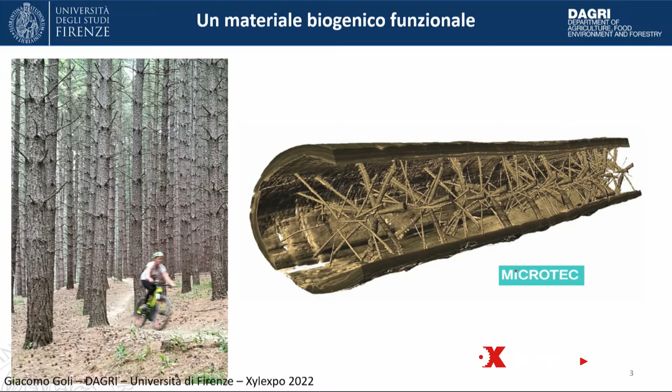This also gives opportunities because wood is a biogenic material, which has a special relation with CO2. It's very advantageous from an environmental standpoint when you do life cycle assessments of wood-based or wooden products. It's a hierarchical structure, strongly anisotropic, and this structure characterizes wood considerably, which is very important when working it.

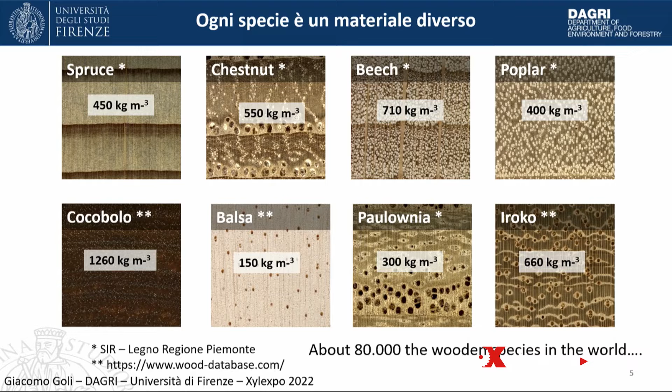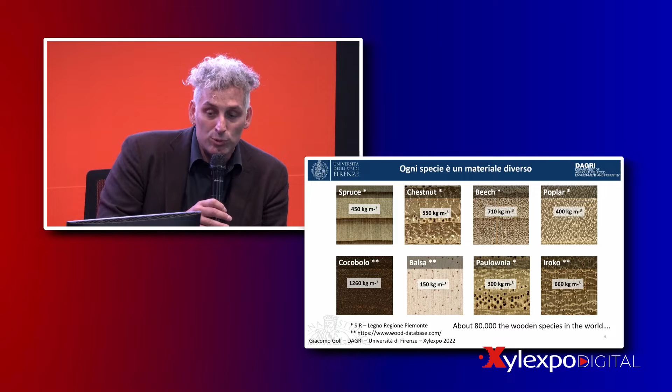There are about 80,000 different wood species in the world, and the panorama is very varied. Cocobolo has a density of 1,260 kilograms per cubic meter. Balsa is next to it at 150 kilograms per cubic meter. It's like comparing stone to polystyrene. Each individual species has its own anatomical characteristics determining its behavior, including density.

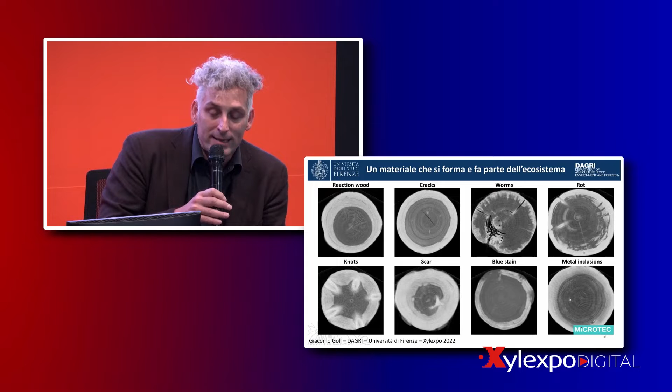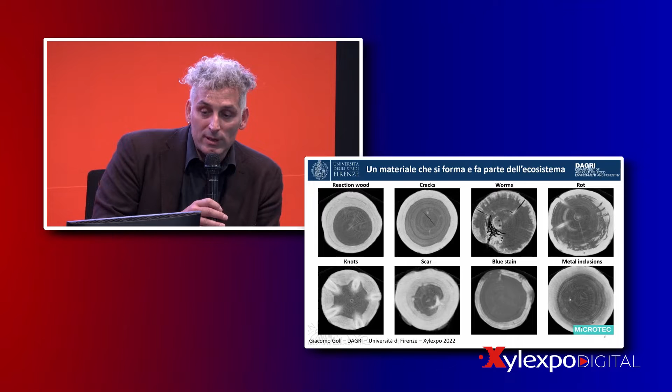Wood does have many defects. These images were made available by Microtec. You see knots, for instance, or cracks, fissures, and worms. The black tunnels are insects digging tunnels. So we find a lot of weird, irregular things inside wood that we have to consider when we're going to work it or mill it.

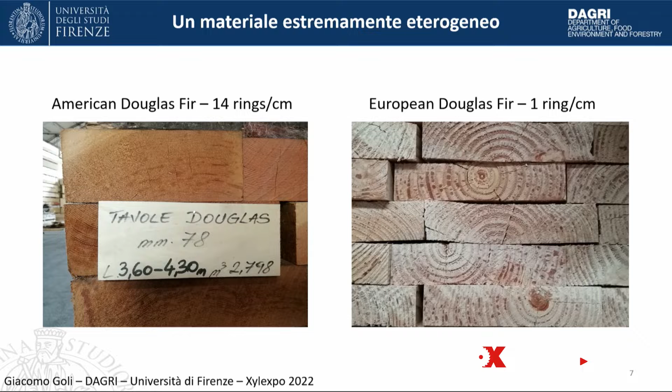We also have to consider that a single species can have highly different characteristics. On the left, American Douglas fir has 14 rings per centimeter. The European Douglas fir has 1 ring per centimeter. So the density and growth characteristics are so different they're almost different species, but they are the same species. You have to consider all this when thinking about woodworking.

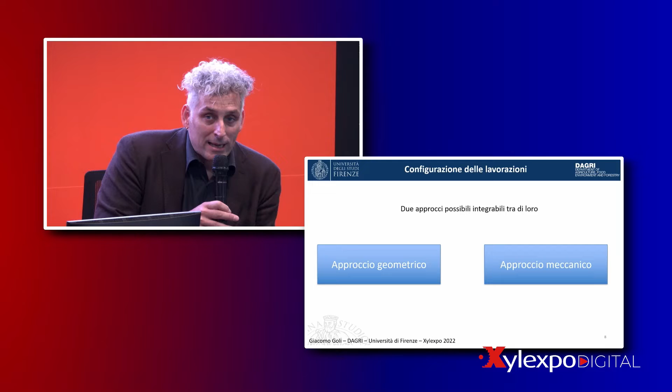When thinking about configurations, we can have two approaches: a purely geometric approach based on the kinematics of woodworking, and a more mechanical approach that we have been working on in recent years, developing studies talking about cutting speeds and forces.

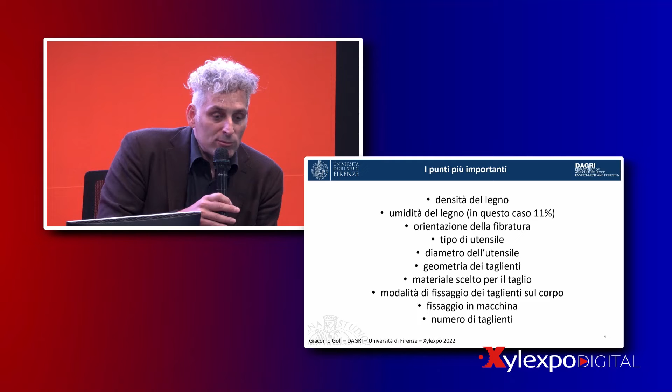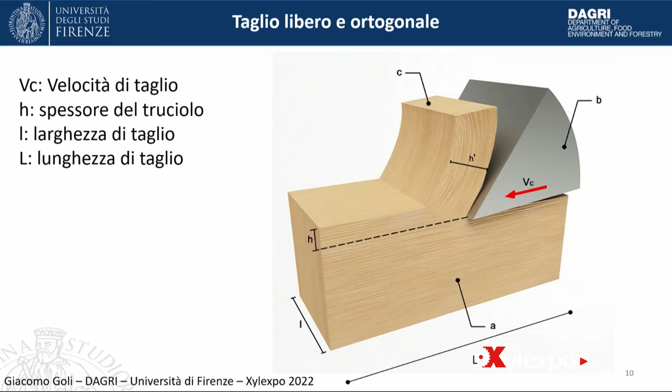Let's think about the simplest cutting manner, the free orthogonal cut. Here we have the cutting speed, the chip thickness, the cutting width, and the cutting length. This is the easiest type of cutting.

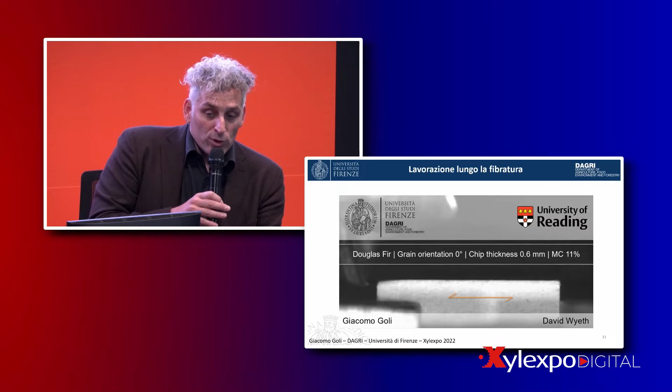In this model, I'm showing you how wood behaves when recorded by a high-speed camera. You see it's longitudinal, and the knife is cutting very well here, at 15 kilohertz, basically 15,000 frames per second.

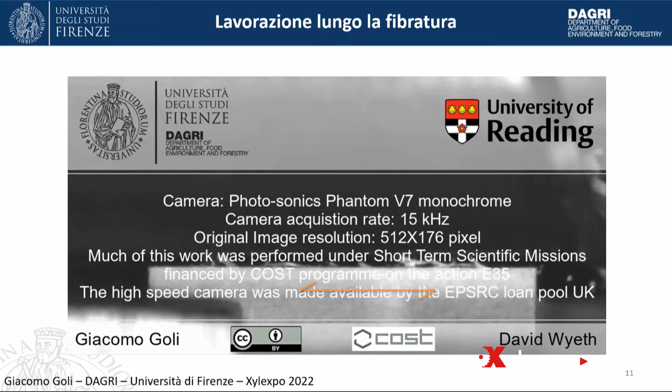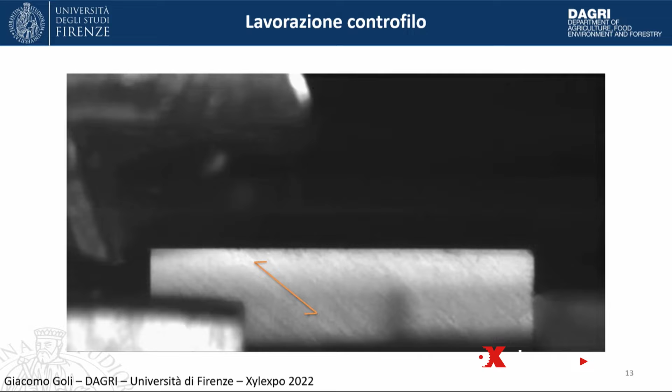If I put the grain slightly tilted in the direction of the cross grain, the cutting edge exercises totally different strengths, or forces, than it would when working along the grain, which I imagine you're all well aware of, but you really see what happens in these pictures.

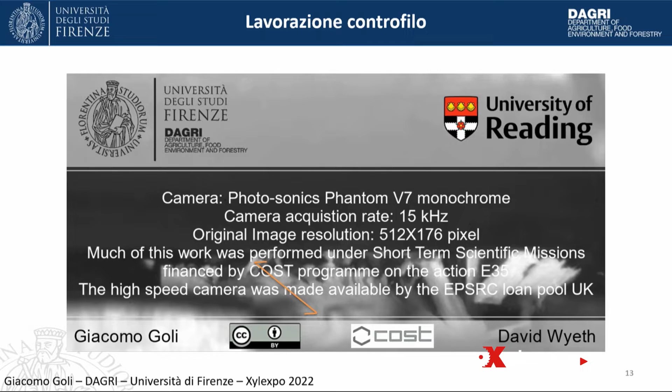And when we talk about forces, we see the differences between two extremes: the longitudinal cut, and the last one, cross grain.

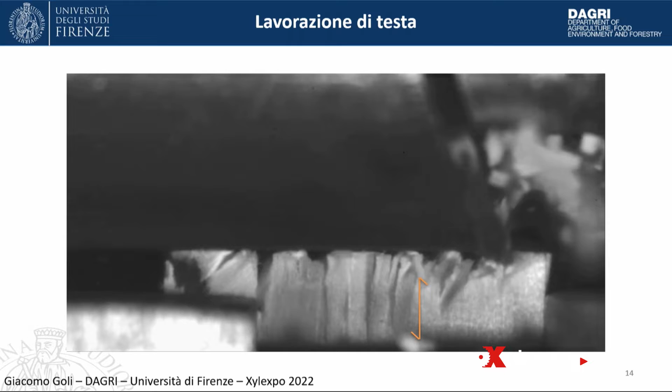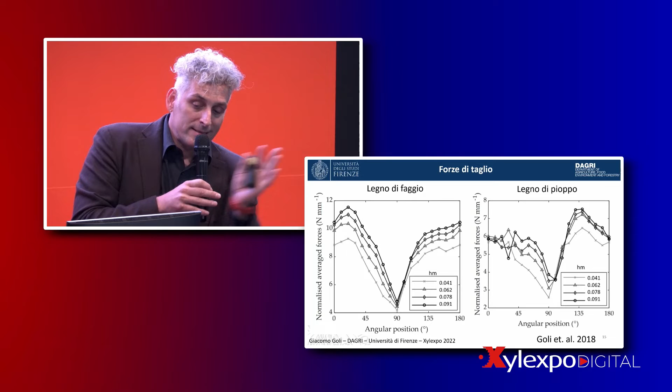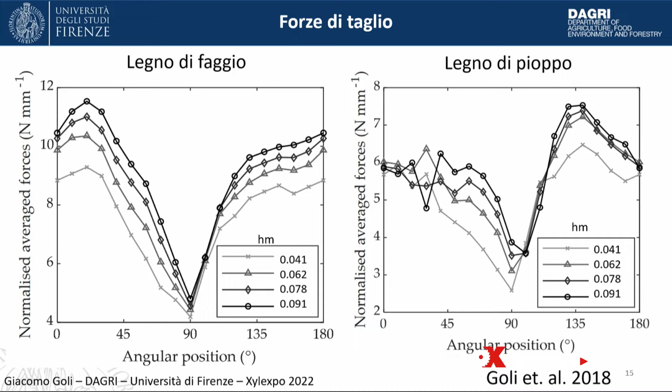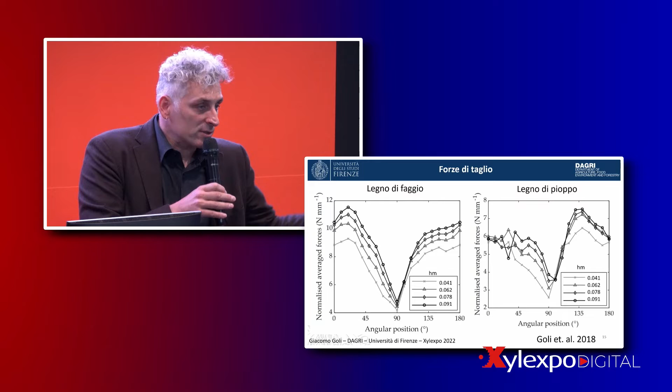Here on the left we have shear forces for beech chips. 0 to 180 degrees represents cross grain profiling. The strength needed to cut beech at 0.091 thickness, the darkest line with circles, is 5 newtons per millimeter of section, whereas going crosswise it's double - about twice the strength needed when working longitudinally. If you look at the right hand chart, poplar wood is less dense, so it shows different, lower strengths. Different wood species can produce higher or lower strengths.

We can calculate the strength of cutting a chip. With beech at 0 degrees, you need 150 Newtons of force, like 15 kilograms, to push it away, whereas perpendicularly you need 300 newtons, or 30 kilograms. With poplar, the values are lower, 100 and 150 newtons.

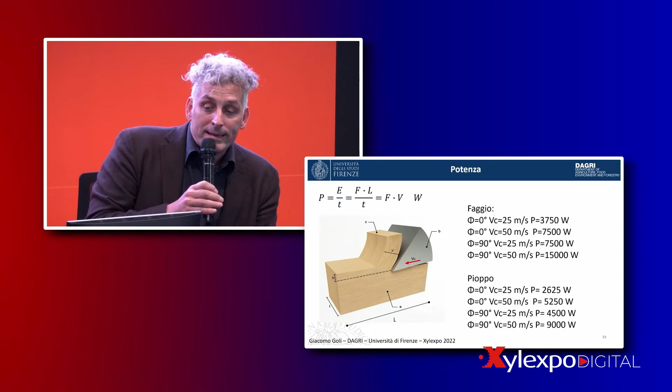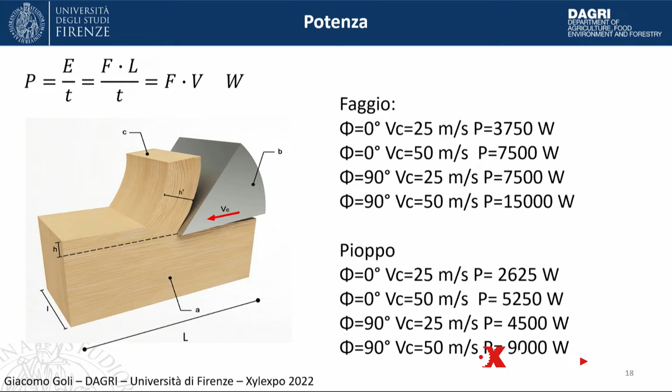From here it's easy to calculate power from strength. Power is strength multiplied by speed - force times speed gives us the power needed to do this job. With beech, working at 25 meters per second speed, 3,750 watts are absorbed. Going faster, at 50 meters per second, I need more power, 7,500 watts. If I work perpendicular to the heads at 25 meters per second, the power needed is also 7,500 watts. And so on.

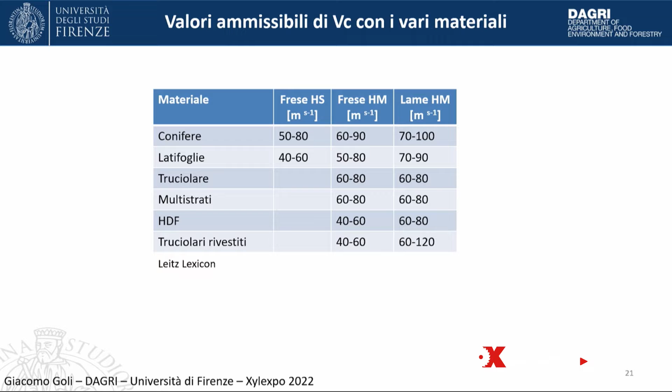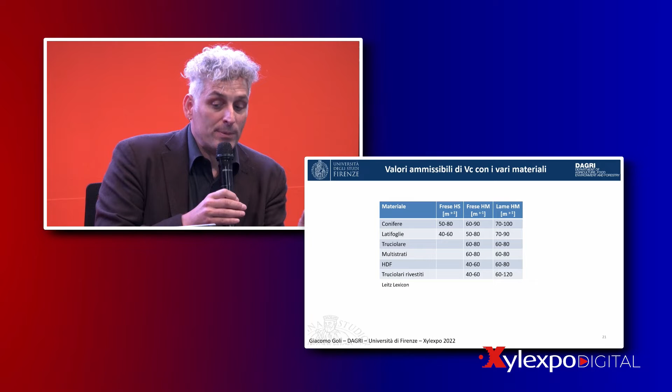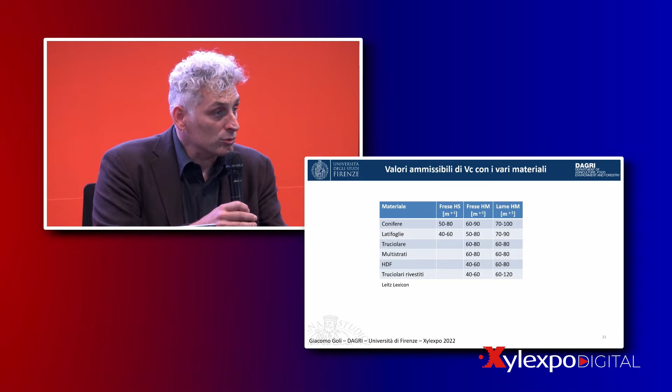How does cutting speed impact the process? The faster I go, the more heat I create, and the hotter the tool gets, wearing out much faster. That's why speed ranges are advised. For instance, with soft wood, for HM millers, we use 60 to 90. Whereas with hardwood, we have to go at slower speeds, otherwise wear and tear would be much faster. And so on with all the types of wood-based materials.

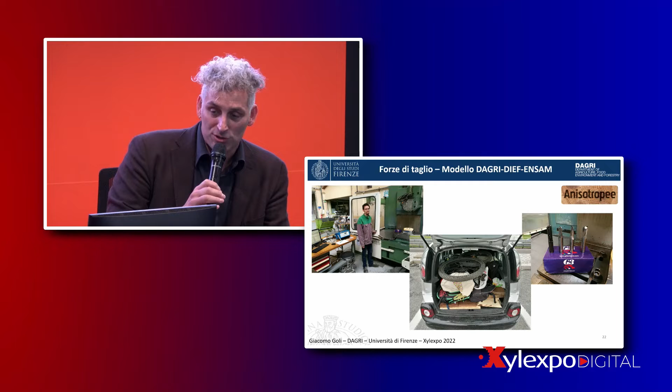We did tests in France, staying there 2 months. We also had a bicycle with wooden panels below, as part of this anisotropy project, sponsored by the University of Florence. I would also like to thank Gianluca Fantacci, who made 3 special millers, or cutters, just for us. And how does the model we developed work?

We have 4 entry variables: the grain angle, wood density, the actual angle of the knife - it can be straight, tilted 15 degrees, or whatever - and the working mode, up milling or down milling.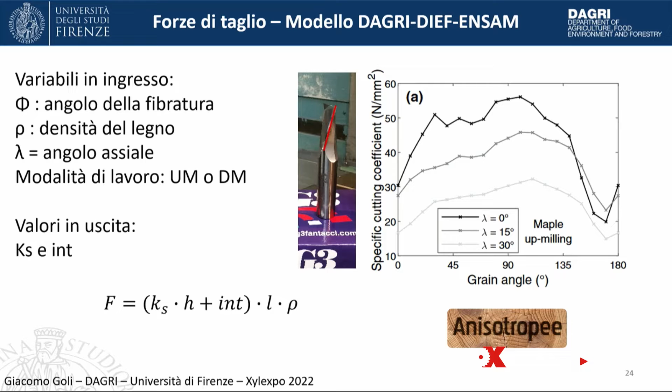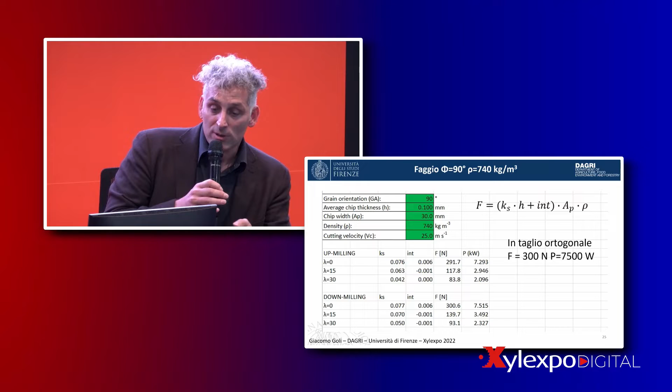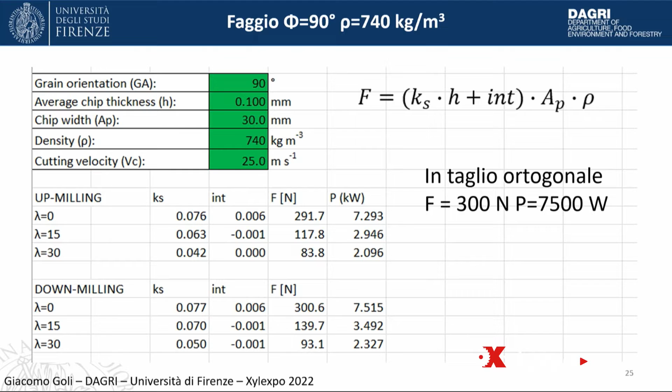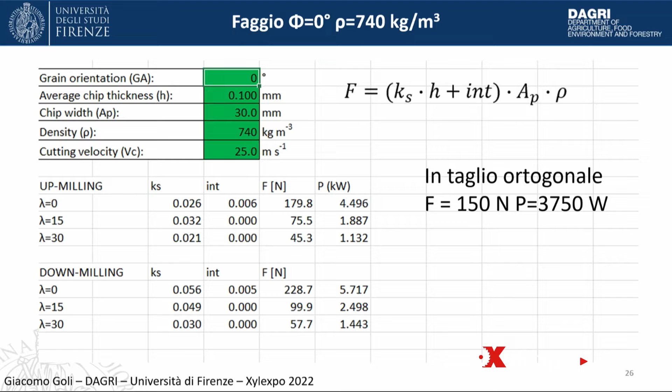I could spend hours on this, but what does the model tell me? There are 2 coefficients, Ks and int, and my formula uses h, the thickness of the chip, and L, the width of the chip, to tell me what force I need to cut the chip. Graphically shown here on top: grain orientation 90 degrees, chip thickness 0.1mm, chip width 30 millimeters, density 740 kilograms per cubic meter, cutting velocity 25. Depending on up milling or down milling and the different lambdas, I get peaks that change - just by using the formula and changing the lambda of the milling tool. In terms of grain orientation at 0 degrees, you see the powers on the right - I'm using much less energy here.

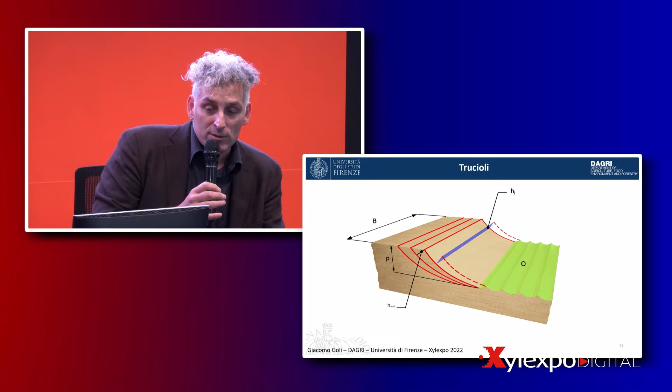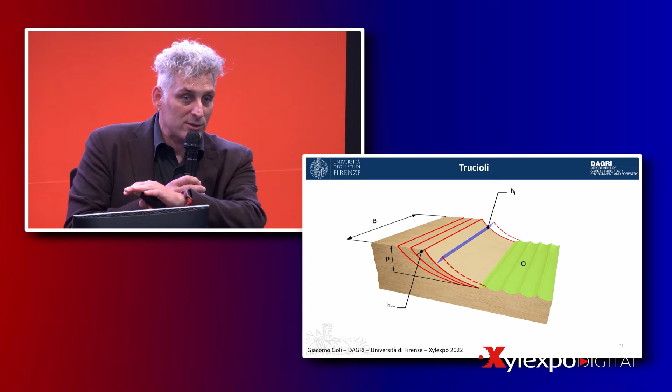This is an introduction to show you how it works. Let's try to apply it to a rotating tool - this was a simplified version for orthogonal cuts. The chips produced here are weird: they are cycloid arcs with zero thickness at one end and the highest thickness at the other end. So I have a number of chips whose thickness is not the same, and I need to calculate the average thickness of the chip. Since it's cycloid arcs, the surface will be left striped by those arcs. There are a number of factors coming into play here - I'm not going to list them, but we have time.

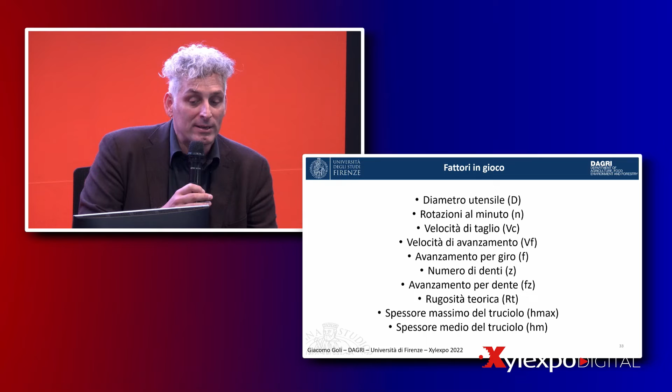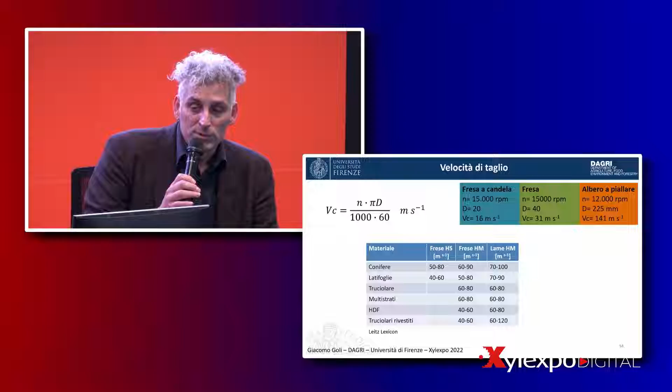So it's various factors, and we have the number of dents or teeth. Theoretical rugosity, a number of roughness, and I've created 3 working conditions.

An end mill cutter, a profiling cutter, and then a planer, with different speeds.

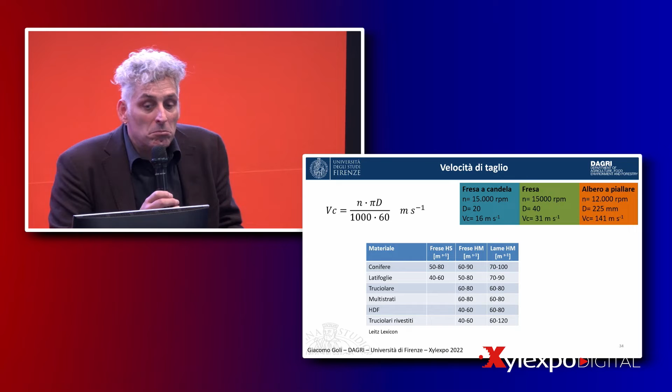You see that these 3 different working conditions immediately produce very different cutting speeds. In the first case, it's 16 meters per second, which is very low. And I'm talking about the end mill cutter. So here we're talking about 15,000 revs per minute.

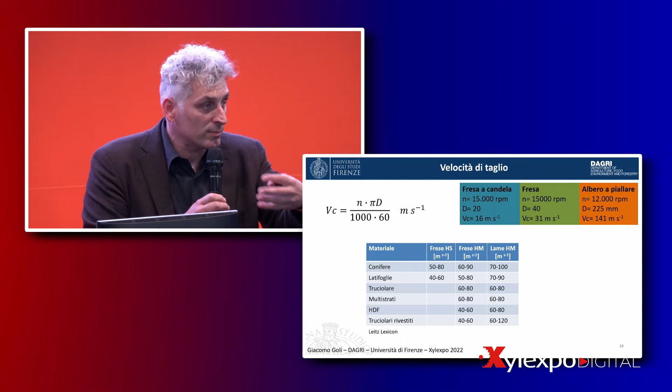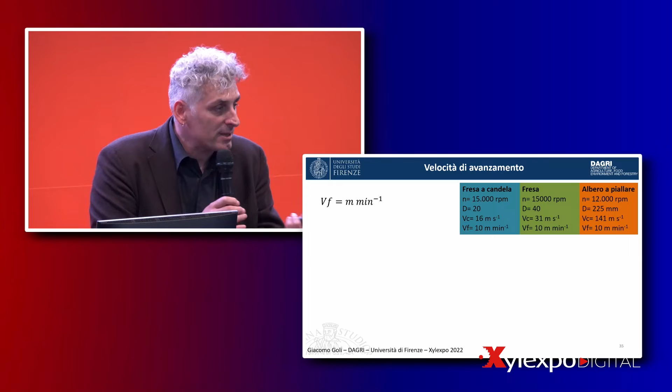Second case too, larger diameter creates higher velocities or speeds, but they can still increase them. The planing shaft instead, we're already talking about 141 meters per second, so it's quite a lot already. So looking at cutting speeds here, I can decide whether I can work at higher revs per minute or not.

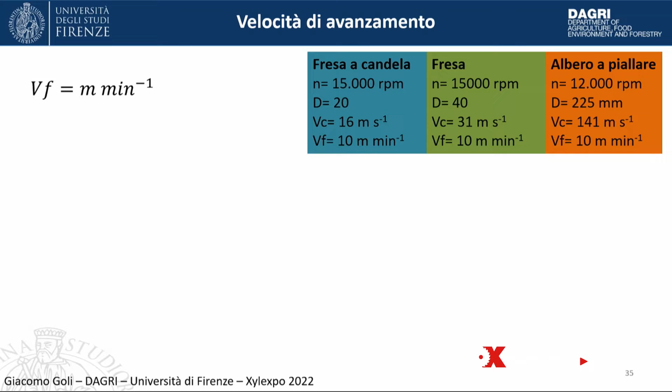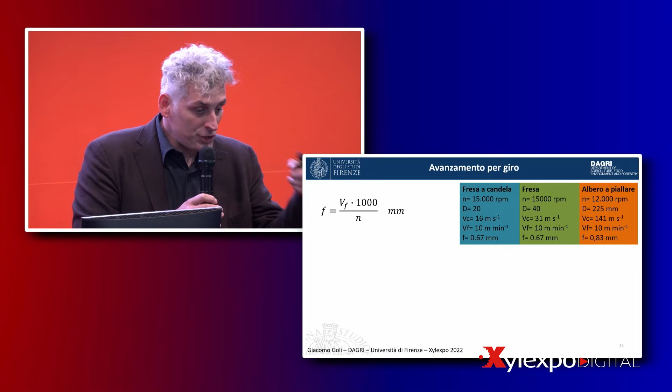Another problem is feed speed, which is the purpose of this presentation. So I set for all 3 working conditions or methods 10 meters per minute as the feed speed. And feed speed, of course, wood moves, and my tool rotates and cuts chips.

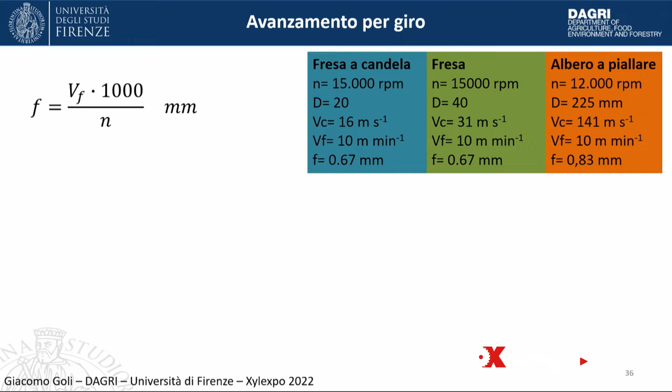In this case, we're going to calculate feed per revolution, F, which is quite an important parameter telling us the feed for each revolution. Feed of the tool. Why is this important? Because the more the tool cuts chips, the more the feed, the longer the stripes, the higher the crests, and the more it will be visible geometrically by the end user, who will see it as a bad, ugly surface.

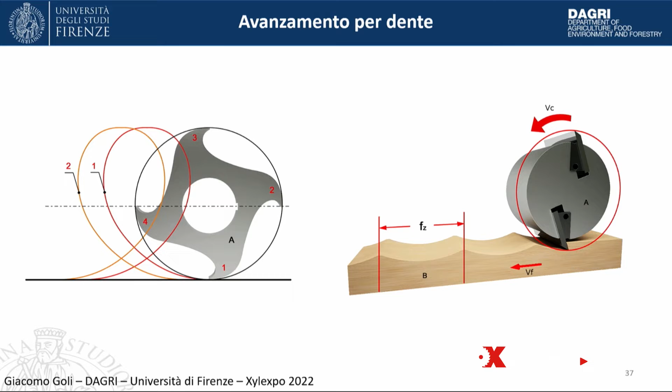F, that we've just seen, is a parameter, but what matters the most is Fz, that is, in the time of one revolution, wood is moving on, but with more cutters, more knives, I can cut more chips. Fz is the feed per tooth or per notch.

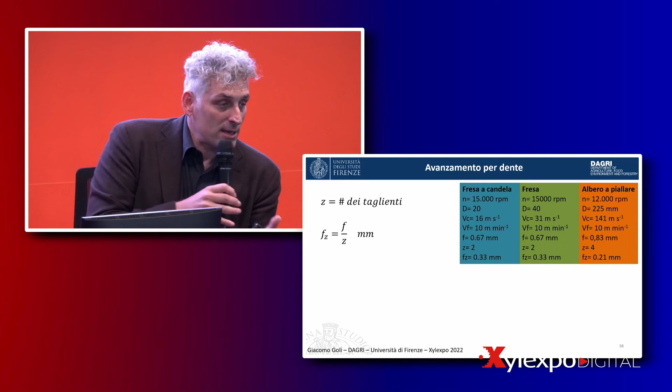So if you look at the end mill cutter with 2 teeth, FZ, the cutter to the planing shaft Z4. So the FZ is the same for the cutters, but now it's different for the planing shaft, the 0.21.

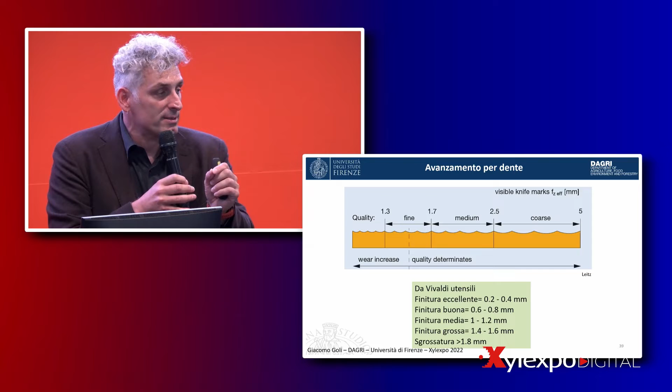This is helpful to see. These are Leitz or tool data, but they define the quality. As you can see, if I have fine quality, it goes from 0.2 to 0.4 millimeters. So if my FZ is between this range, I will have good fine quality.

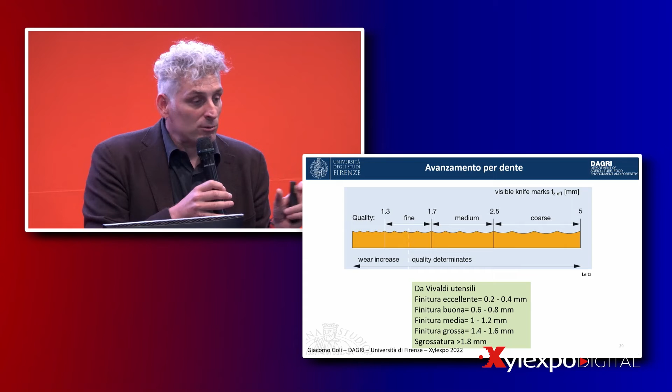If I increase FZ, I will see those waves, and so quality decreases. So setting the feed speed can be done geometrically using the FZ formula to obtain the FZ I need.

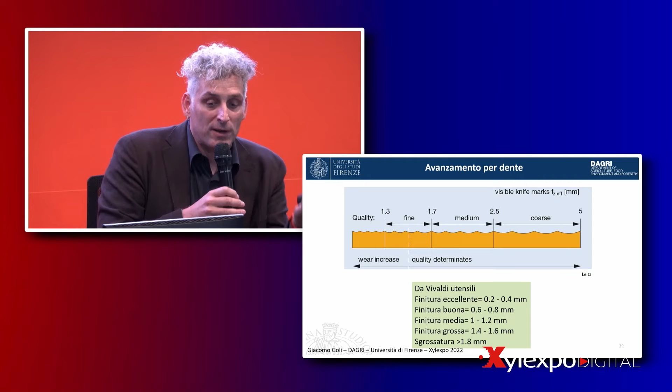If I need to make a beam that is going to be placed 20 meters high, I can have less fine quality. But if I want to have a manufacture like this, an item to be held in a hand, then I need very fine quality.

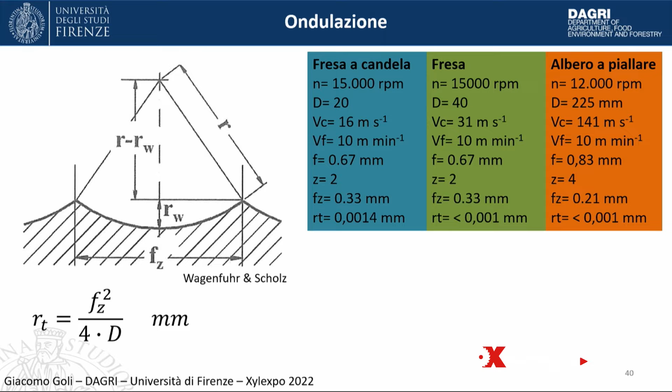Another key factor is how tall the crests are compared to the lower plane. In my drawing it's RW, the waves, how much is the height between the bottom part and the upper part, RW. This is another easy to calculate parameter.

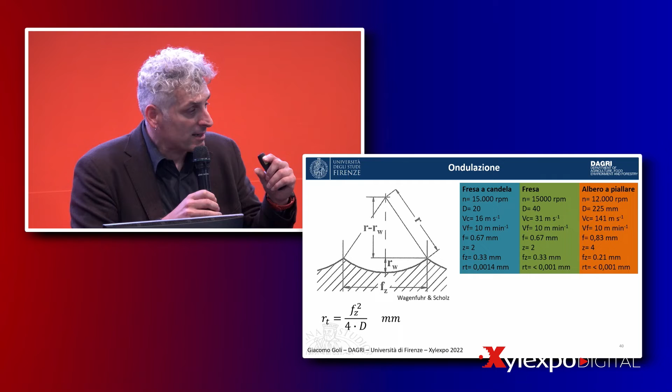If this parameter is below 1 micron, as in the case of the cutter and the blade, you can barely see it. Whereas if you have the end mill cutter and RW is higher than 1 micron, then you can start appreciating and seeing these crests.

I've tried to develop a graph, and this is a simulation of a surface obtained with processing at 5,000 revolutions per minute and 6 meters per minute.

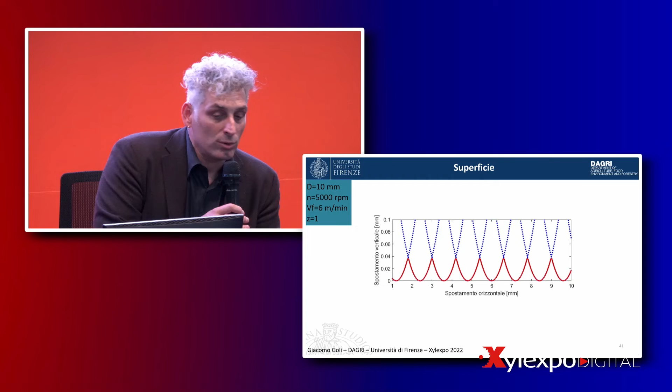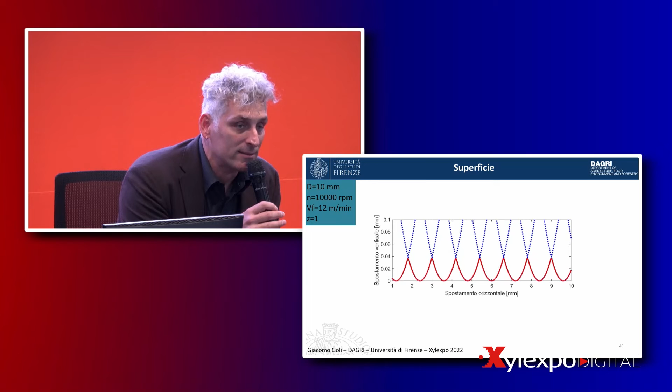So what happens if I double the feed speed and the cutting speed? Nothing really happens, because if the RPM and the feed speed both double, my final surface will be identical. If I work with 6 meters per minute and 5,000 revolutions per minute, when I double these two parameters, I will obtain the very same result.

So if I have a surface that I'm satisfied with, but I want to increase my productivity, I may as well increase the revolutions per minute together with the feed speed and still have the same result.

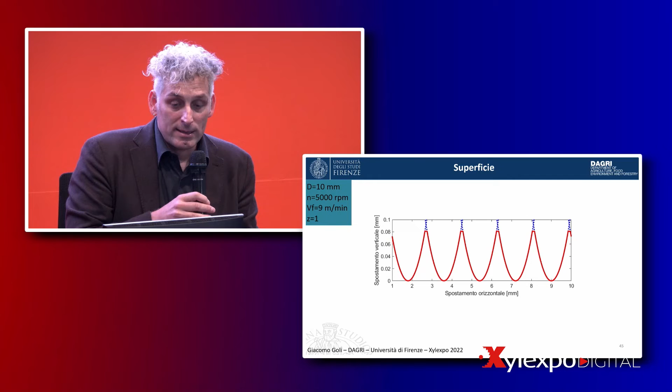What happens instead if I increase the VF parameter, feed speed? FZ also increases, and the surface becomes more irregular, so there will be all these waves that are more visible.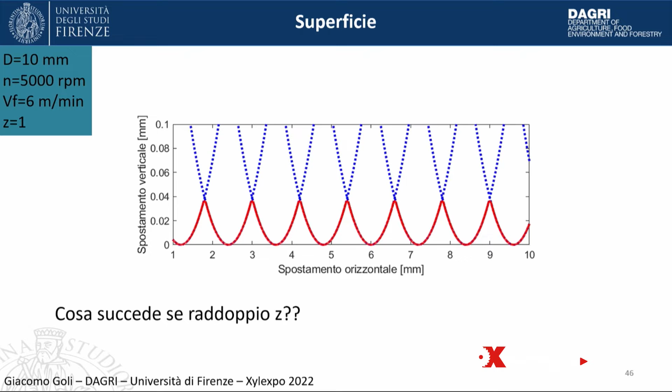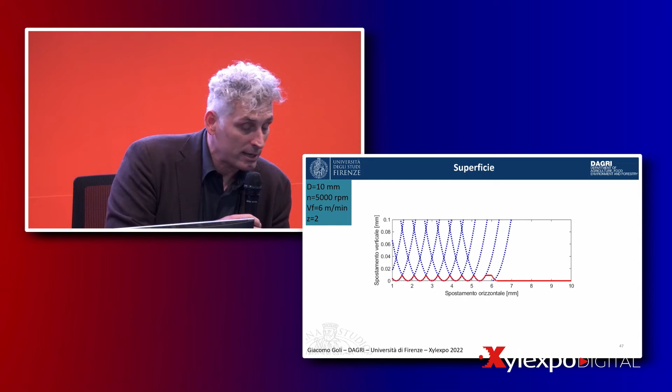What happens if I double Z as a parameter? So instead of using one cutting edge, I use two cutting edges. Well, the result in graphical representation will be this one, a more regular surface.

What happens if I increase the diameter of my tool and all the other parameters remain the same? Well, in this case, I will obtain a better surface, a better quality surface. With small tools, I may have unsatisfactory surfaces, and so I can improve its quality simply by increasing the tool diameter parameter.

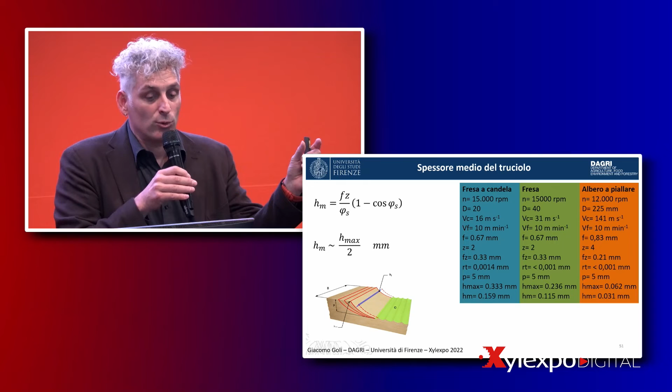Another aspect I can calculate with these formulas is the chip thickness, H max. In the case of the end mill cutter, it will be 3/10. In the case of the blade, it will be 6/100, so much smaller. However, when you calculate the cutting forces, we need the average chip thickness, which is very easy to calculate. You take the H max and divide it by 2. And this is what you obtain, the average chip thickness values.

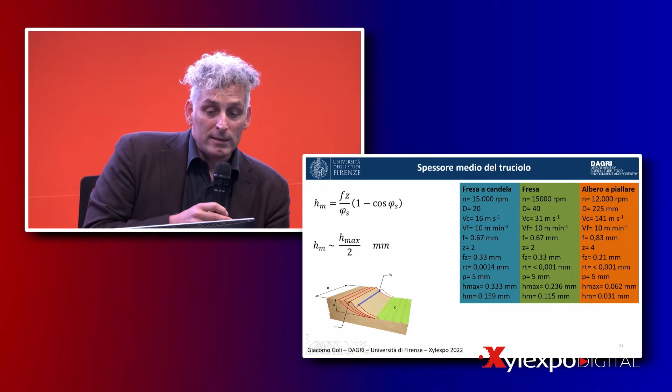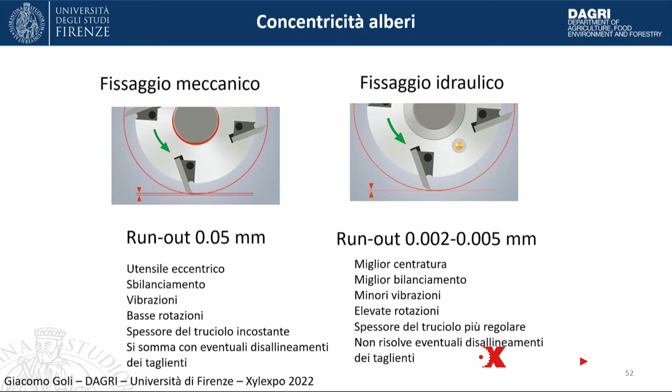An important point I'd like to make is about the fastening system. If I have a mechanical fastening system, in order to insert a shaft inside another shaft, I need to have some room to play with, at least 5/100th. So I will have a run out at least equal to 0.05 mm. The average chip thickness in my blade is 3/100th, so it's much smaller than the run out of the shaft. So if I have 2 cutting edges, 2 tools, in these conditions, only 1 cutting edge will be able to work.

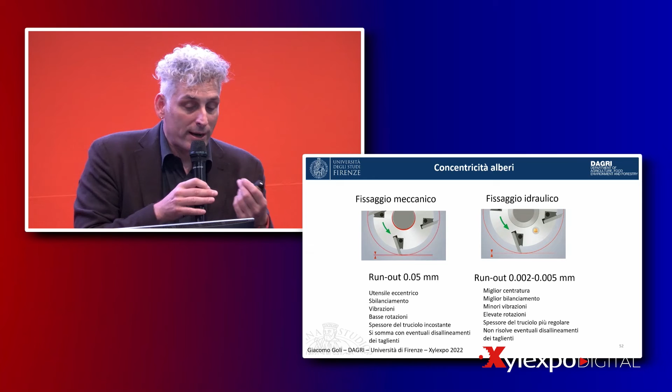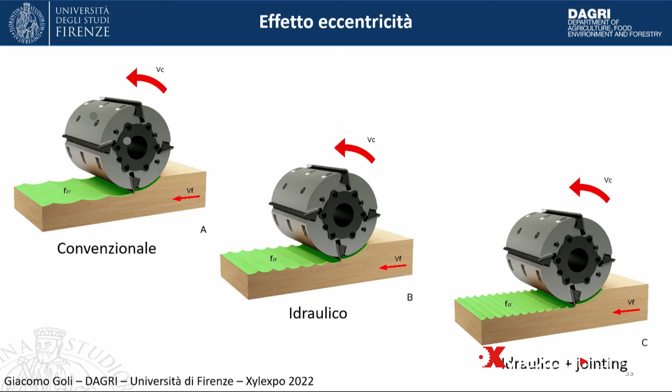If I have a hydraulic fastening, which is much more accurate and produces much smaller run out, 2 to 5 microns, I will work much better. So a conventional shaft, or spindle, will have only 1 tool, 1 cutting edge to work, and so my FZ will be very high, with an ugly looking surface. With a hydraulic fastening system, I will use more cutting edges, not all of them though, but still a better looking surface. Whereas if I use all the cutting edges on my machine after inserting the shaft, all the cutting edges will be aligned, and the quality of my surface will be very, very good.

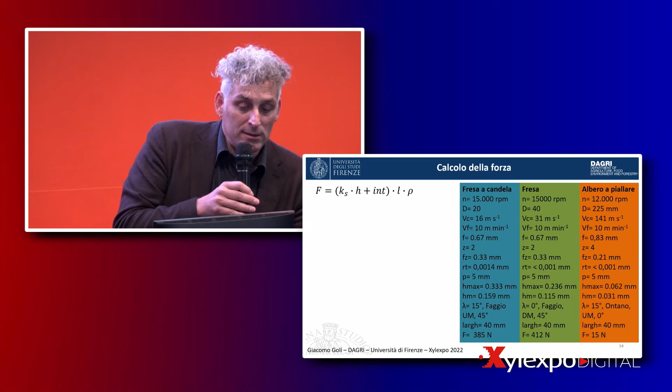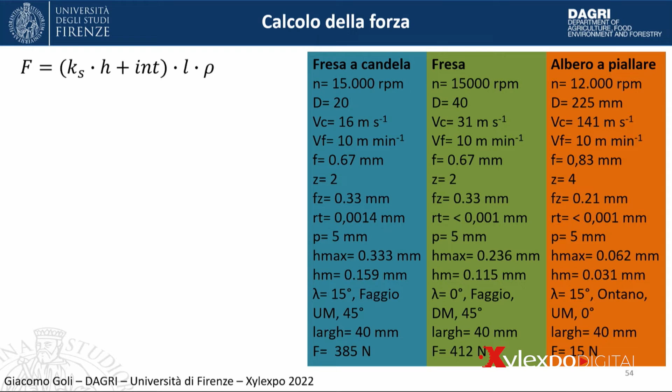So by using the model I showed yesterday, we can calculate the force required to cut these chips for an end mill cutter: it's 385 newtons, if I use beech with a 45-degree grain angle and a width of 40 millimeters. Similar conditions for beech wood with a straight cutting edge, I would use 412 newtons. Whereas in the third case, with the blade, if I cut along the grain with a 15-degree axial angle, I would obtain 15 newtons in terms of required cutting force. So this allows us to calculate ultimately the cutting power.

In the end mill cutter, I will use 6 kilowatts to perform this job. For a normal mill cutter, I would need 14 because I have a straight cutting edge tool, whereas in the third case with the blades, I have a number of factors that allow me to just consume 2 kilowatts only.

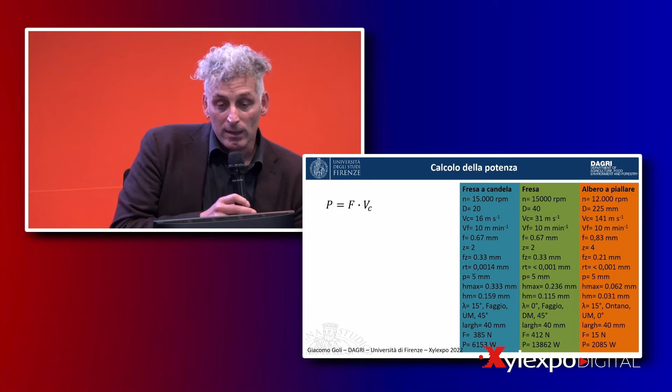So as I get to the conclusion of my presentation, I'd like to underline that I've tried to select the most important aspects in determining cutting speed and feed speed. There are geometrical criteria or formulations that I can insert in an Excel spreadsheet that can provide good guidelines and input for setting up this type of woodworking process. I can also adopt mechanical models that allow me to calculate the cutting force and power, and this gives me input on whether I need to increase or decrease the feed speed, or whether I am working with a higher or smaller chip thickness. So whoever works with wood needs to be proud to be able to work and interpret a material that is extremely complex and heterogeneous.

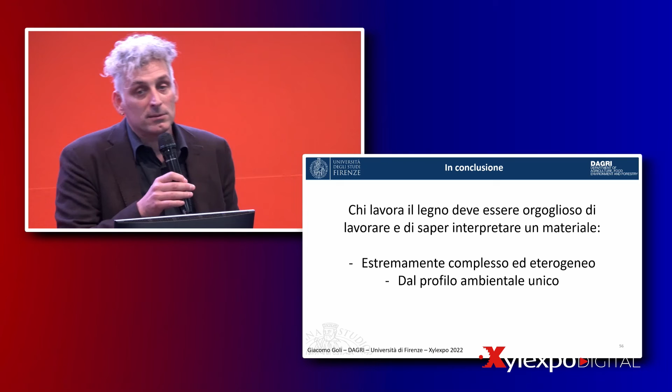Metals are much simpler to work with. Wood is also a material that has a unique environmental characterization or profile, and from the point of view of environmental friendliness, it has nothing to learn from any other materials, if I may add.

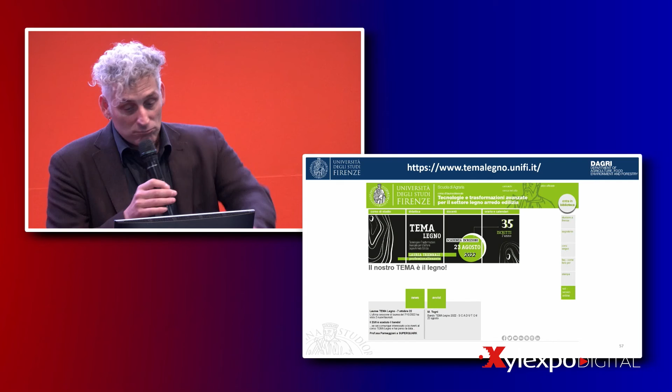I was very quick, we still have time. I was afraid I would bore my audience, I would tire them up, so I tried not to be too long.

I'd just like to point out that at the University of Florence there is a graduation program in technology and advanced transformations for woodworking, wood furniture suppliers and building wood. This is a graduation program that provides a lot of knowledge about wood and its use, microscopic identification, scientific methodologies, wood and wood derivatives, characteristics of wood species, technical standards, solid modeling. There is a training course on building structures in order to be able to have a conversation with project planners. We also offer design training programs so that our graduates can have a conversation with designers. You can check all these options on our website under the chapter Didattica, teaching offer or educational offer. You can certainly find all the details of what we offer.